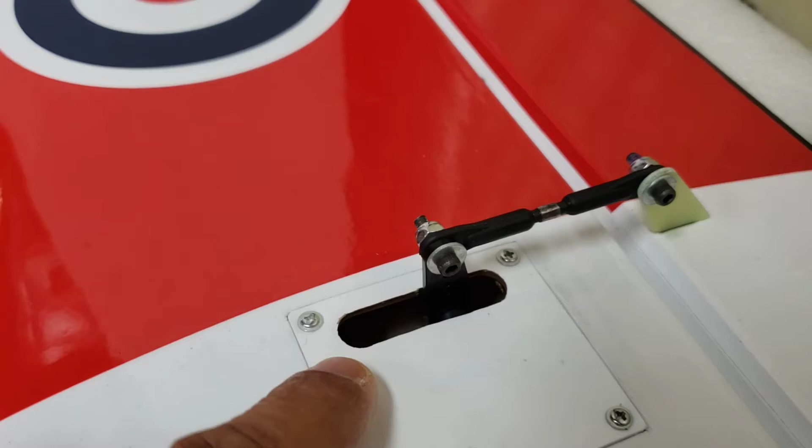Okay, so first we're going to start out at the servo boxes. Servo boxes on the Blackhorse are absolutely crap, in my personal opinion, the way that they were designed, simply because when you install your servos, the head of the servo is either going to be, whether you flip it or not, doesn't matter, way the hell down here or way the hell down here. So the challenge there is going to be that you're not going to get enough travel to make the servo work.

So what you're going to have to do is find neutral, and then you have to install your servo arm so that it's a little bit off neutral, if that makes sense. So basically, you're going to install it so that you get enough travel for both up and down. Okay? The other thing, too, is the...

Linkages that come with the plane are hot garbage, in my opinion. These are the linkages that I'm holding in my hand here. And to be honest with you, the best thing to do with them is just this: garbage, drop. They're no good. I wouldn't use them if I were you.

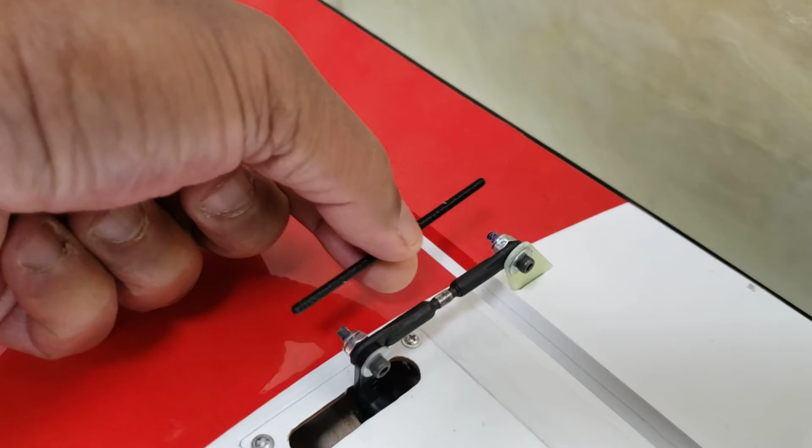I decided to go with Dubro ball links as well as Dubro turnbuckles. This is the turnbuckles here. You're going to have to do a little bit of cutting to get them to fit, but it's not a big deal. The other thing too is I decided to go with the Du-Bro 4-40 nylon lock nuts as well, just to make sure that everything's nice and secure.

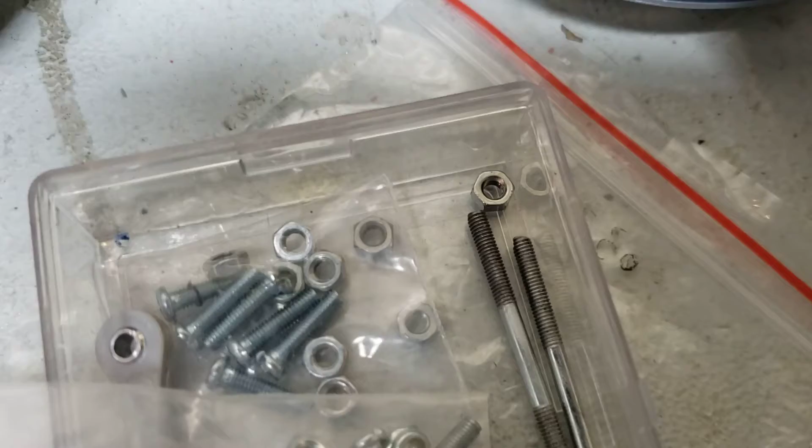The plane, the kit actually comes with these pieces of crap. I would not use those either. After a couple of turns, I guarantee you that those things are going to loosen up, even if you've got Loctite on it. Don't use them.

And the other thing that I did as well too, before we leave servos, let me just tell you this. If you're going to be using the King Max servos, the servo arms that they come with are too short for this application. You're going to have to get something that's probably about 1.25 inches or so, simply because when the servo arms are reaching about here, you're not going to have the travel that you need this way. So you're going to have to get longer servo arms to make that setup work. Great servos, don't get me wrong, but it's just the servo arms are just too short for the screwed up servo boxes that they have with the plane.

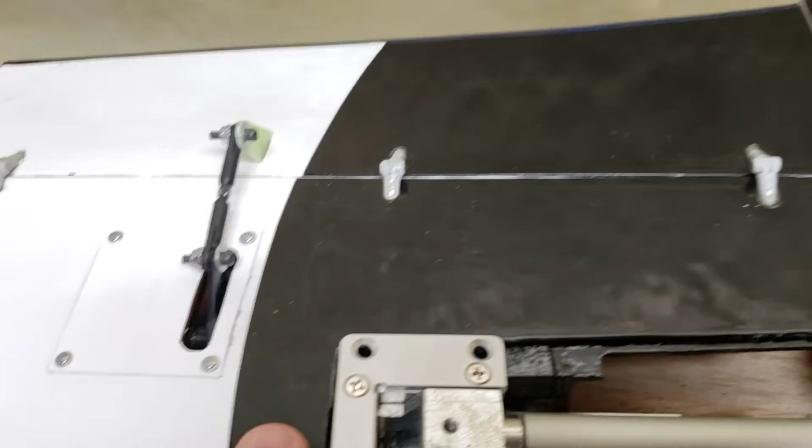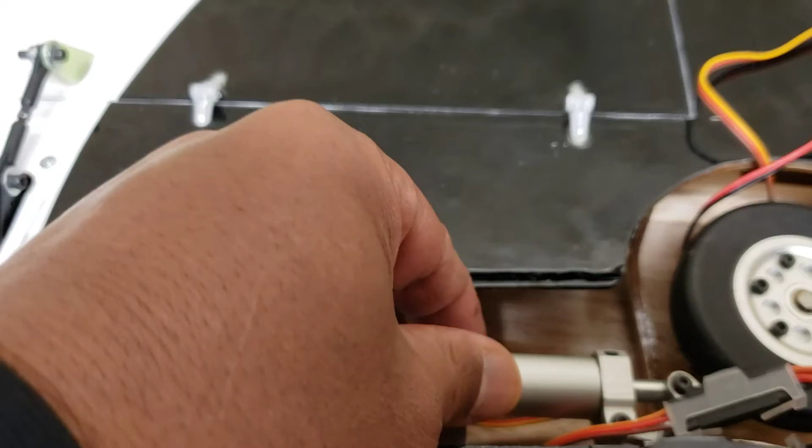Next, retracts. So the main retracts, these are 12K all metal Hobby King retracts. Great retracts. The only issue that I've heard people having is the shaft that's from here to here. Because it's a completely smooth shaft and it's only held in place by a grub screw, there is no flat spot on the shaft. So you're going to have to put your own flat spot on to minimize any sort of twisting, because I know that some guys are having issues with that.

As far as wheels go, I decided to go with 65mm JP Hobby electromagnetic brakes, and those should work out quite nicely.

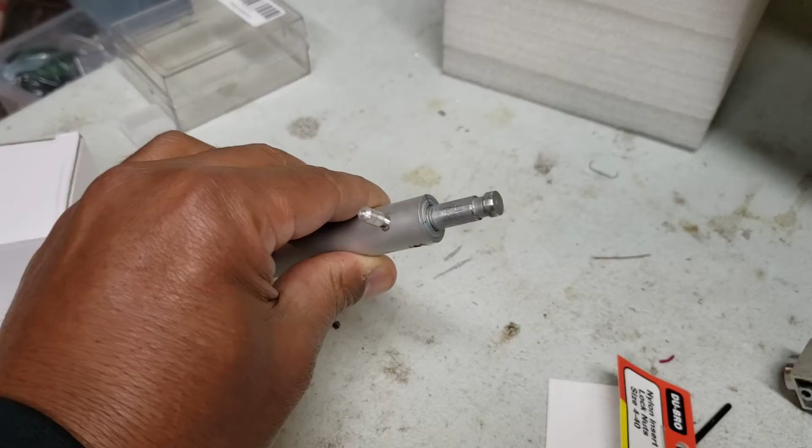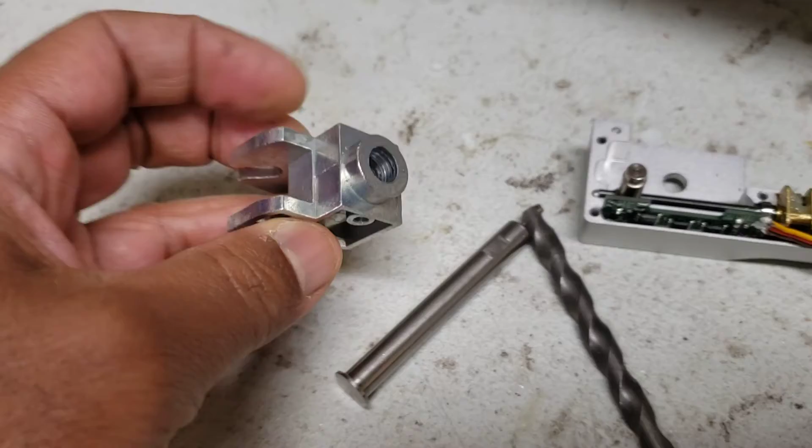Next, nose wheel strut. Okay, so the nose wheel strut is a little bit more than 8mm. These are 10mm, these are 8, these are a little bit bigger than just a little bit bigger than 8. And the Hobby King nose wheel retract, you're going to have to pull it apart to get to this trunnion. The reason why you're going to need to do that is you're going to need to sort of ream out that trunnion because, like I said, this is slightly bigger than 8mm, and this shaft is exactly 8mm.

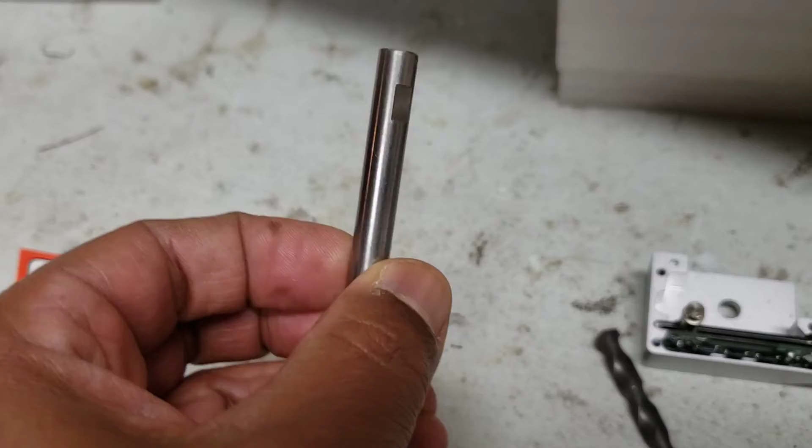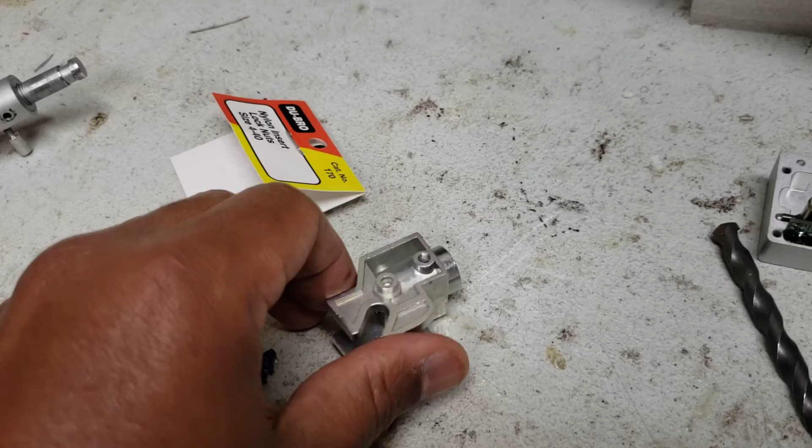Okay, and obviously you can't use this pin in here because it's just not designed that way to just slide in. So what you're going to have to do is drill this out. So the challenge is going to be, how do you hold it to drill it out? You're going to need a vise. So when you put it in the vise, do not put this just by itself in the vise, because what will happen is you will crush that little nipple there, that goes right in there. And then it won't move freely as it rotates for up and down.

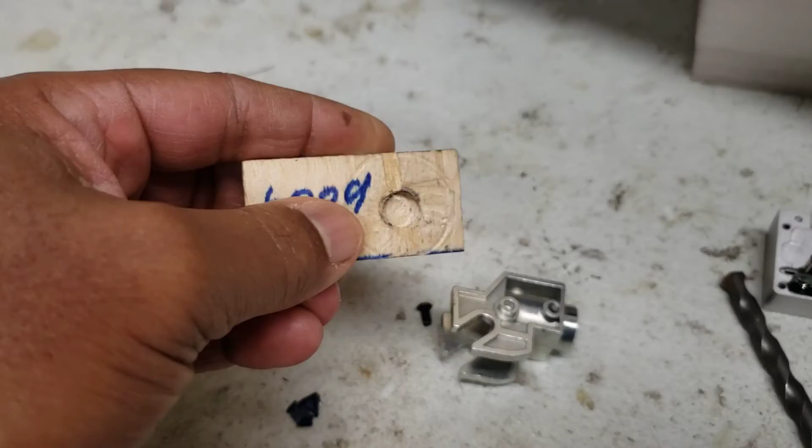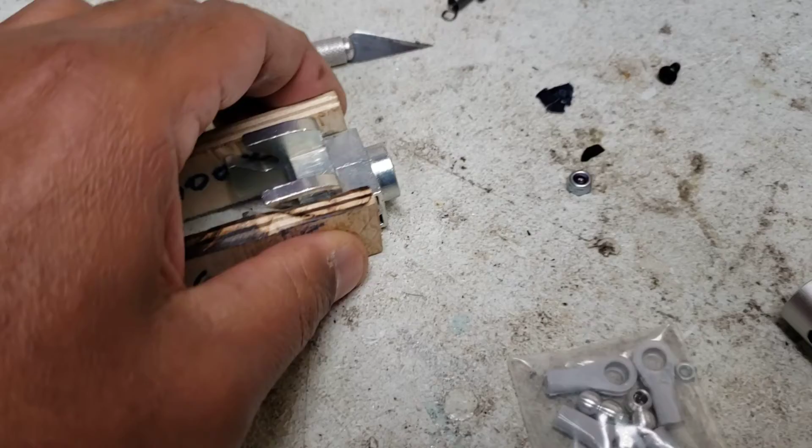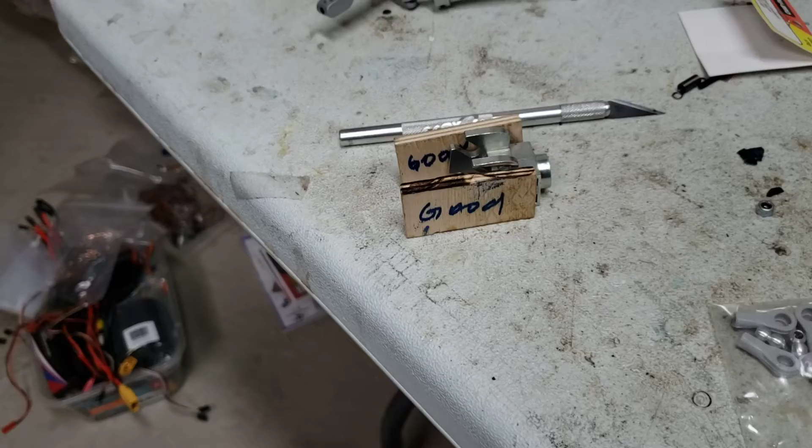So what you're going to have to do is just get a little piece of plywood or balsa, drill a little hole in it, put it over top of that. Get two pieces, obviously, and put it like that. Then take it down to your vise, tighten it down slightly so that as you're drilling down, the down pressure does not push this down. Just make sure not to tighten the vise overly tightly.

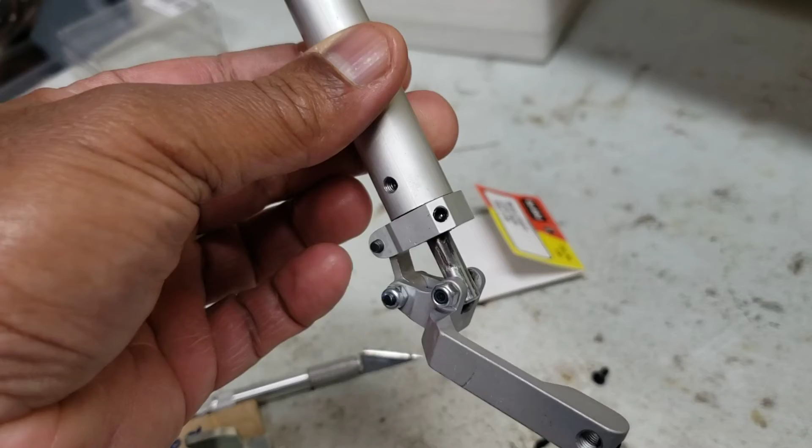Otherwise, you could run the risk of squishing these little nipples, which is not good. Next thing about the retract, and this goes for all the retracts, every single solitary one of the grub screws on this thing has no Loctite, so make sure that you put it on every single one of them. Go over the thing with a fine-tooth comb, otherwise you'll regret it, trust me.

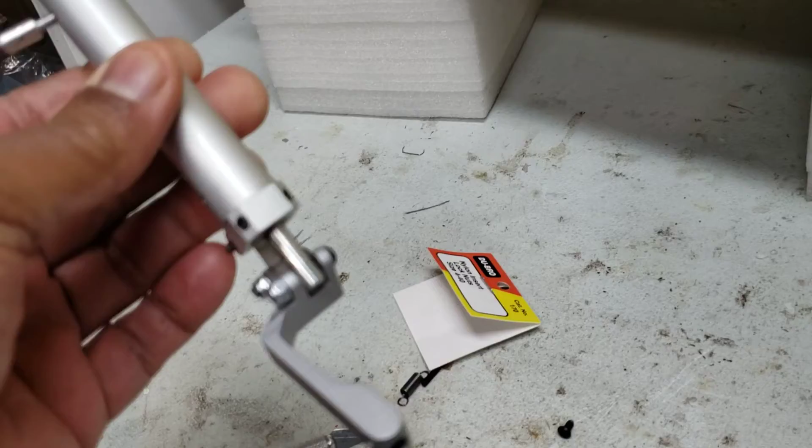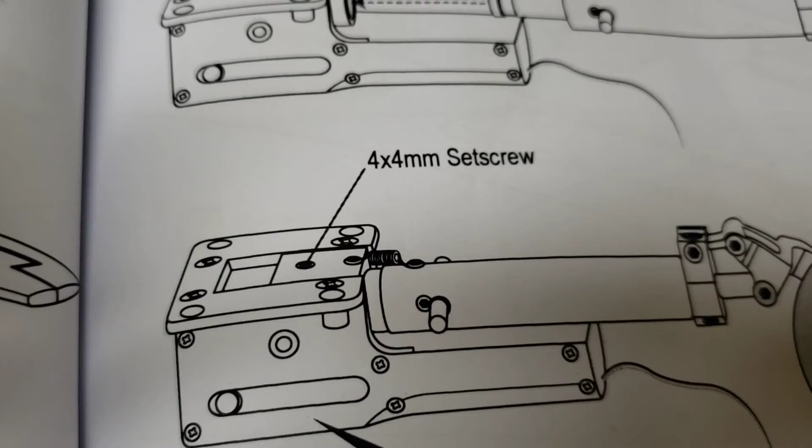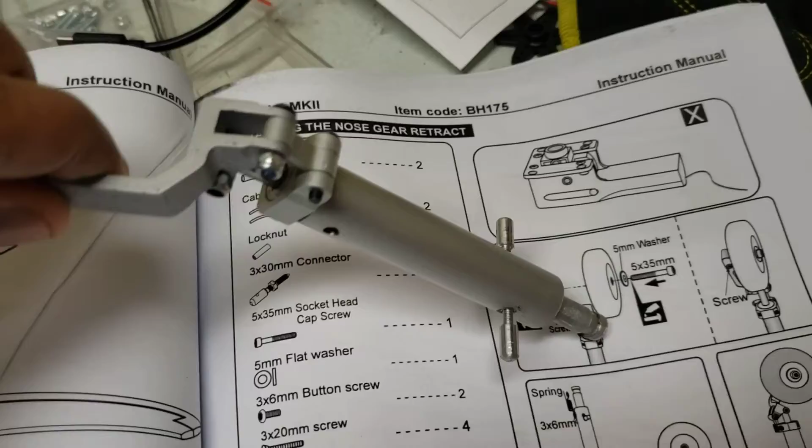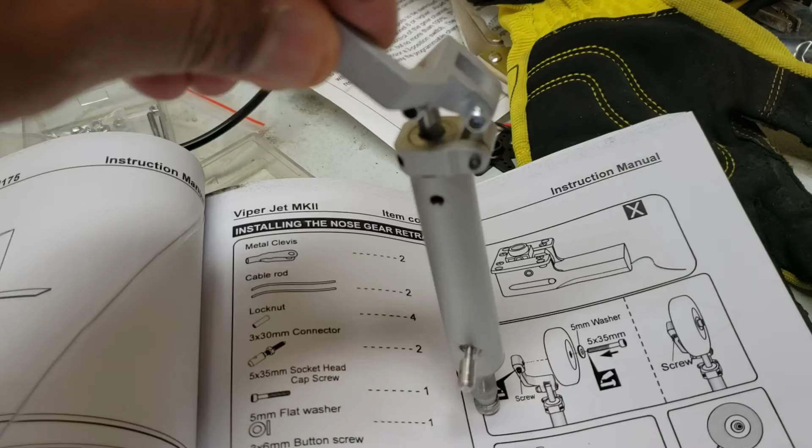The last thing about the nose retract is this. If you look at this diagram here, you'll notice there's a little spring here, and that little spring is attached to that little hole. The reason why they have it is so that as this retract pulls up, this spring is supposed to be attached here and attached to the trunnion so that it minimizes this from going side to side. So it minimizes the slop because it's a pull-pull system, and pull-pull systems usually have a little bit of extra slop. The problem is they drilled it on the wrong side.

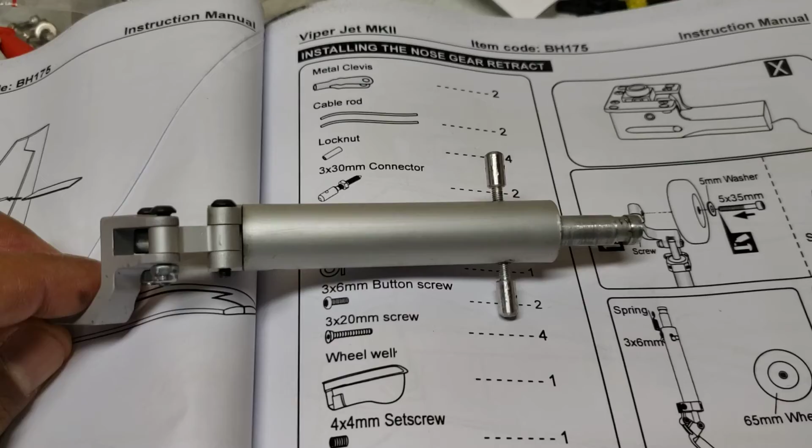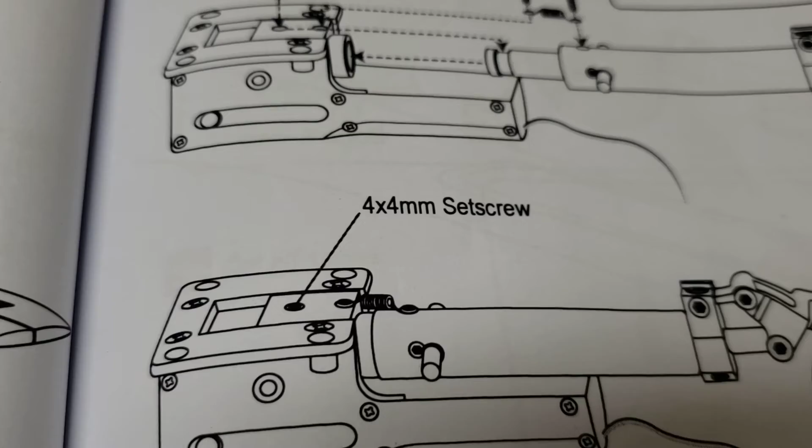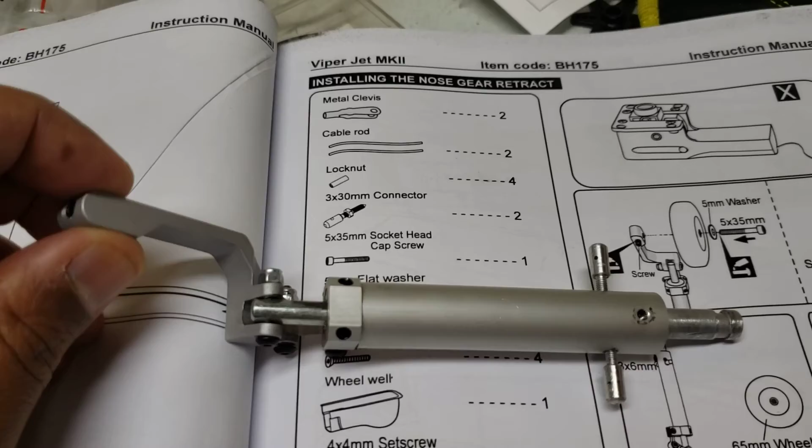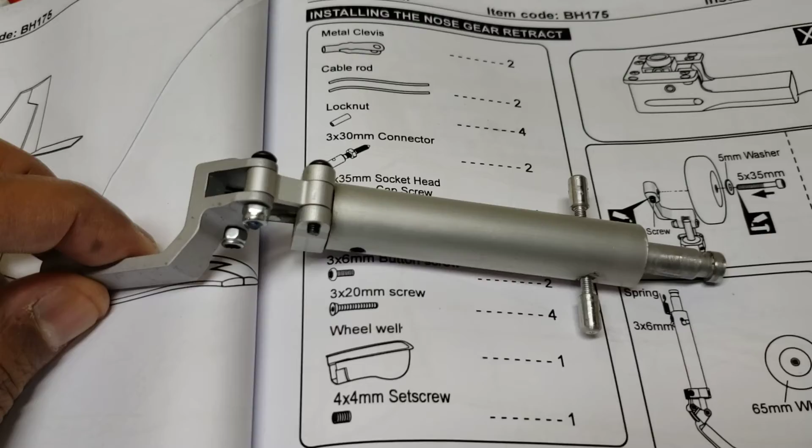So this is what the retract is supposed to look like when it's fully retracted, just like this one. But if you noticed, the spring is on top of the retract. Well, there's no hole here. Where's the hole? On the opposite side. So they drilled it on the wrong side from the factory. That's not a huge deal. All I've got to do is tap another hole on the back side here, and we should be able to solve that problem. Now, I might not even need to do that because, again, the whole reason why they did that is to minimize slop, I believe.

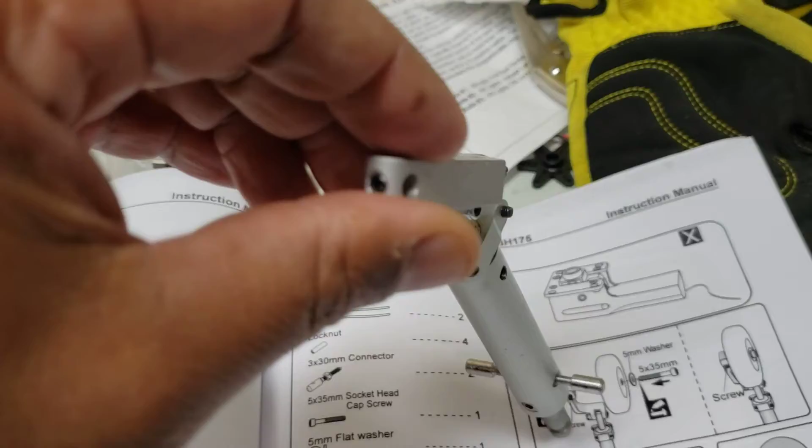Next, I decided to go with a Wemotec 100, just as Warchak did. If you guys haven't checked out Warchak's YouTube channel, you really should, because this guy has basically done so much on this plane, it's ridiculous. In fact, this 3D print that you see here was directly from him. So this is a 100 millimeter sort of inlet ring that would be attached to the tabs that's already in the plane design for the 120 millimeter EDF.

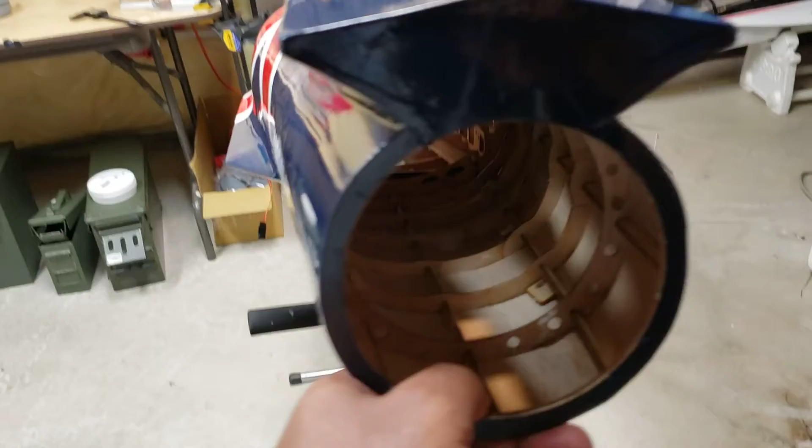Now again, I'm running a 100, not a 120 from Wemotec. So the challenge that I'm going to have is this is obviously going to be further back in the plane, and there is no actual physical tabs for this in the plane. So I'm going to have to figure out how I'm going to do that. Not sure if any of you guys have already done that. If you have, drop me a message on YouTube, and if you can help me out, I'd truly appreciate that. As you can see, way down there, that's where the mounting tabs are for the 120. So as you can see, there's nothing in the back here, so I'm going to have to figure that one out.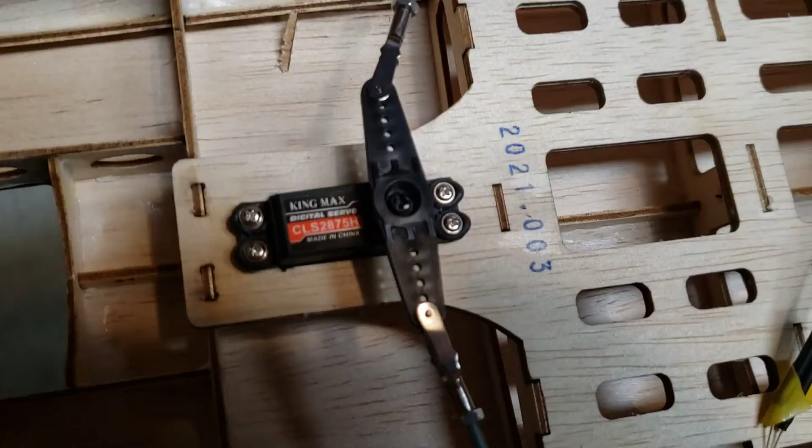Last thing I'm going to say is for those of you guys that did order the KingMax CLS2875H high voltage servos, when you install it in the nose, you're going to have to do a little bit of cutting, not much, just to get it to fit. This is also the same thing for all the servo boxes. This servo is just slightly bigger than the actual servo boxes that they're providing. It's not a huge deal. Just cut it out, grind it out, and then put some CA throughout the wood just to make sure you're reinforcing everything.